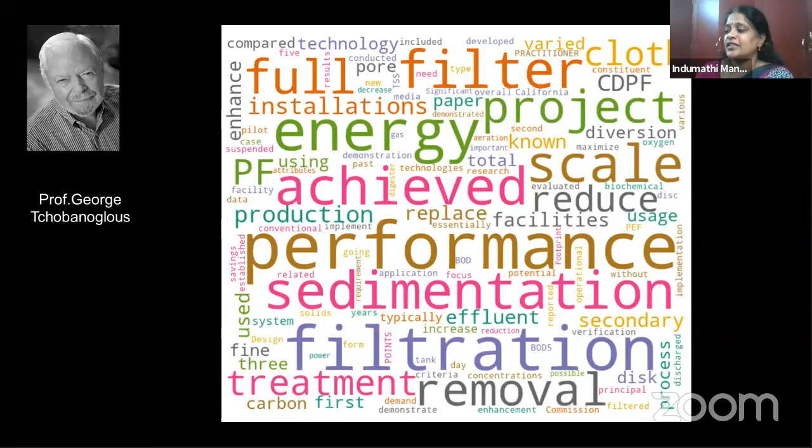Harold Leverenz is an environmental engineer with experience conducting studies in water use and resource recovery from waste streams. His recent work has included the development and testing of novel water and wastewater treatment processes, such as nutrient recovery from urine and digestate. This is actually the project which brought us together. He has also worked with anaerobic bioreactors, closed loop water reuse systems, and anoxic treatment wetlands. Harold received his BS in Biosystems Engineering from Michigan State University and MS and PhD in Environmental Engineering from UC Davis. Currently, Harold is a project engineer at UC Davis and is a licensed engineer in California.

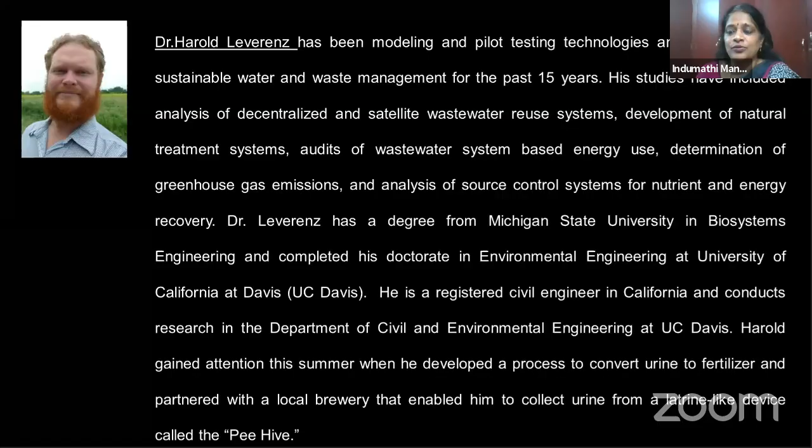Without much ado, I would request George to start his webinar, which is a very important topic: some things which normally we miss in conventional wastewater treatment design and operation. So he's bringing to us some of those missed concepts, which are very, very relevant to the 21st century and, more importantly, in current times. Over to you, George. Thank you.

It's my pleasure to be here with you. As I was telling Indu earlier, I haven't put a tie on in 9 months. And so if you can see me, I actually do have a tie on. So I'm delighted to be here.

And the topic today is really wastewater management in the 21st century. And what I want to do,

Move to your slides. Just open your laptop and then press the share screen, Professor.

Yes, sir, we can see your presentation now. You're all there. It doesn't go down here. I think we are fine. Yes. Which one? You just click on the button. Okay. So for our discussion this evening, what I'd like to do, I think it's this one, right? It was on before. Just open it and press the share screen. Okay, 1 second. Yes. We can see you're all set, sir. Can you see that? Can everyone see the screen? Yes. Yes, sir. All right.

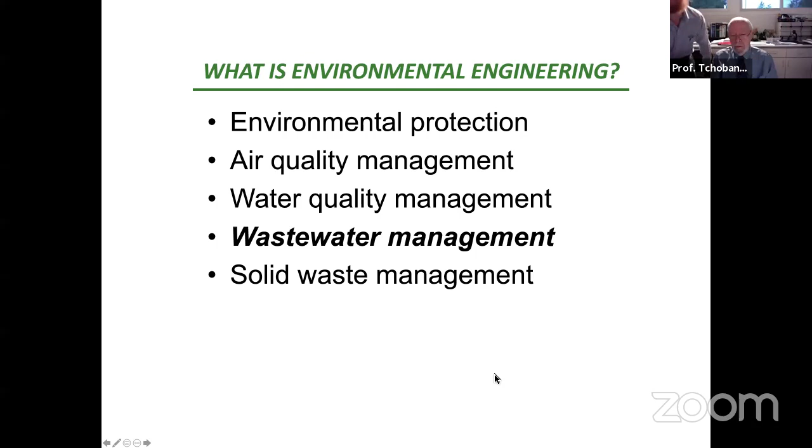It won't come down. And advancing. We're having some... This is the same one. There we go. You can choose the arrow keys.

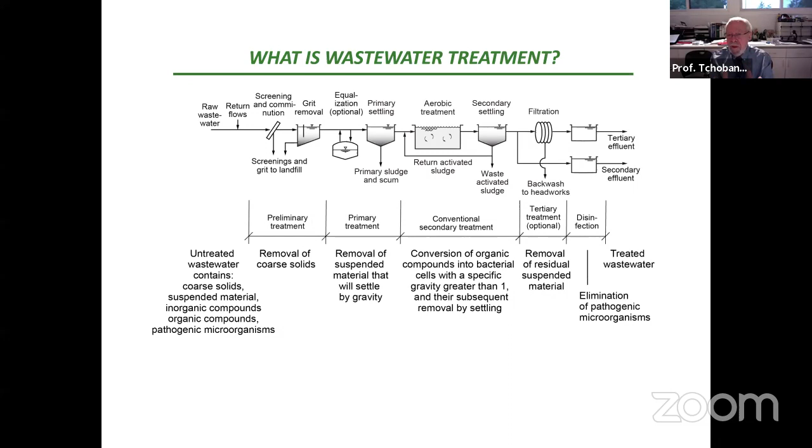So what are the 21st century challenges? Well, there are many, but I'd like to deal with three. The first one is we are going to have to deal with unintended consequences of past decisions. And in all of your work, all of you will face this particular problem. Secondly, we've got to bring about a paradigm shift to move beyond ideas that are limiting or no longer valid. And then finally, we need to talk about integrating water and wastewater management.

And so what is the problem here? If we want to reuse the water from either of these two locations, we have to pump it significantly, and we have to put pipelines in that would disrupt residential areas. So it has become a very complex issue to recycle from existing wastewater treatment plants. And again, the unintended consequence is that no one thought there would ever be houses all around these treatment plants.

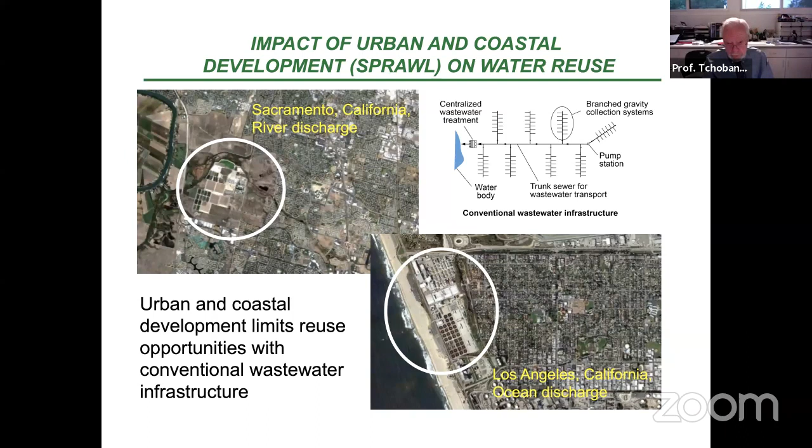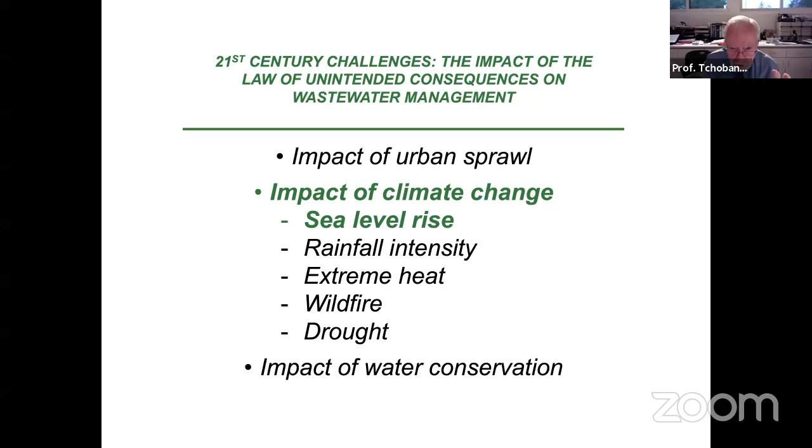But what has happened in recent times is that we have far greater hurricane surge flows and far more often than we had in the past. At the same time, there's been infilling here throughout. And with this infilling, as a result, with the larger volume, the surface water elevation at the end, when the velocity goes to zero, rises. And unfortunately, you see what happens.

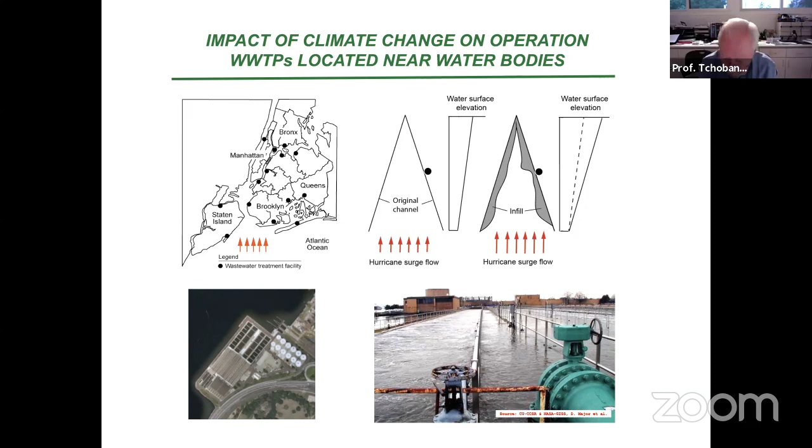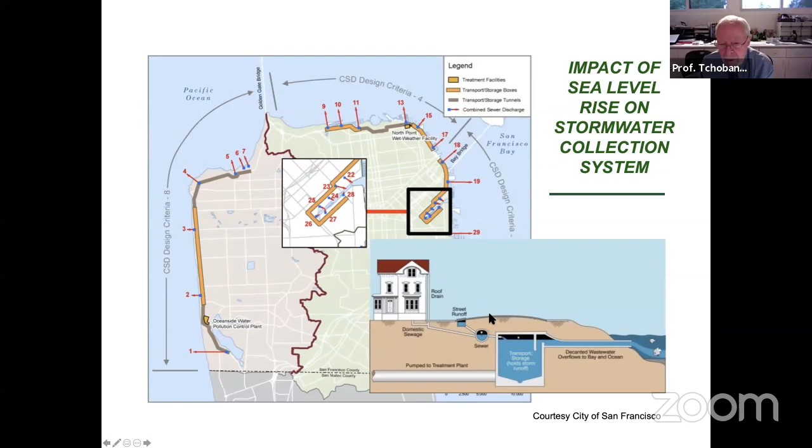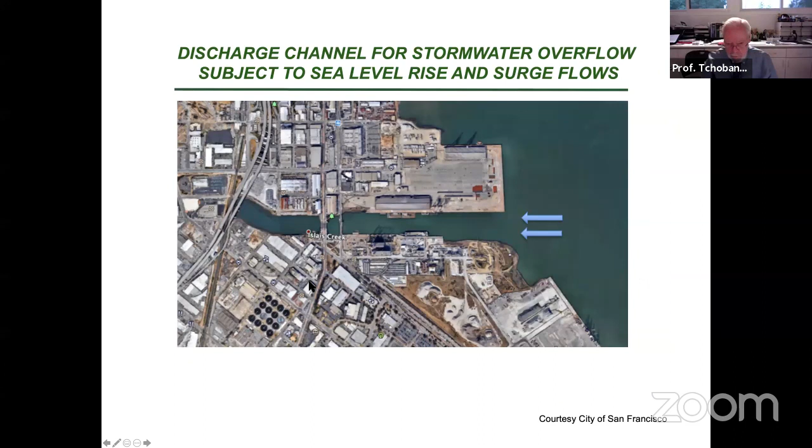Now, what has actually happened? Well, the weir elevation is set at -4. And look what's happening with the tides. And since 1950, the water levels, the tide levels have exceeded the elevation of the weir. So instead of water flowing out of the basin, water flows into the basin.

Now, what kind of problems are caused? Well, you bring in seawater with high sulfate concentration, and it mixes with all the oils and grease from the restaurants. And so if you walk along the Embarcadero in San Francisco, you will see vent pipes, and they're venting all the hydrogen sulfide that's being produced. And so here again, an unintended consequence.

What has happened now? They have had to raise the weir, and they have had to install pumps to pump water out of these basins into the receiving water. And again, an unintended consequence. No one ever thought the water would rise to this level. And with increasing sea level rise, these events are occurring all of the time.

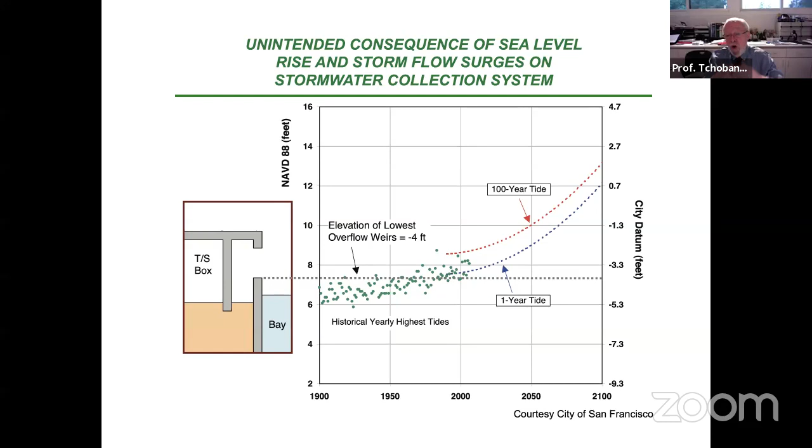Now, the next unintended consequence I'd like to consider is water conservation. And when we think about water conservation, I'd like to start with the diagram over on the left-hand side. Basically, our population has remained constant, but if we look at the total flow rate, it has gone down. Now, R1 is pre-1992, and around 1992, conservation measures started to be implemented. And as they've continued to be implemented, the flows have come down.

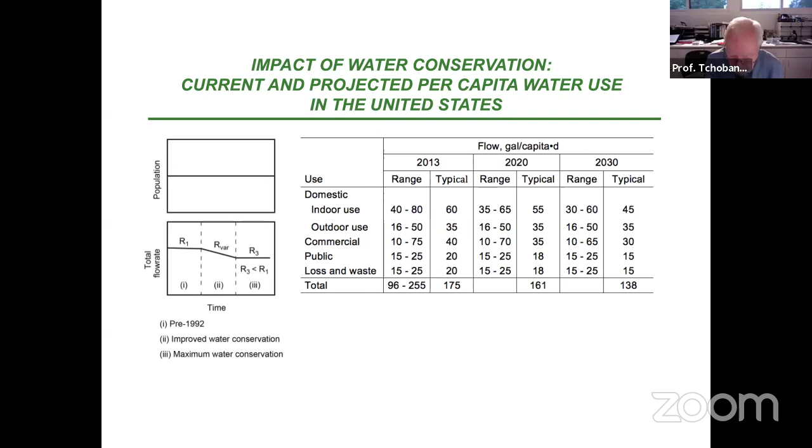The issue is we don't know where they're going to stabilize because there are still a lot of old appliances. For example, washing machines that have tubs with 30-gallon capacity. We're now moving to 7 gallons per load. So again, the idea is that we started at a relatively high value, we're moving down, and you can see what the rates are. So what does this mean with respect to concentrations of wastewater?

In the past, wastewater treatment plants were designed on some average concentration. And the issue now is that there is no average concentration. And so what we really have to do is consider the waste discharge per person, and then ask ourselves, what volume of water is that waste placed in? And so here's an example.

So if we look at constituents, BOD, chemical oxygen demand, total suspended solids, total Kjeldahl nitrogen, potassium, oil, and grease. And the unit we're going to use is grams per capita per day. And as it works out now, we have fairly good data on what the typical values are. So if you put these grams into 100 gallons, 380 liters, the concentration comes out to be 199 milligrams per liter. And that's in the past what we would call a medium strength wastewater.

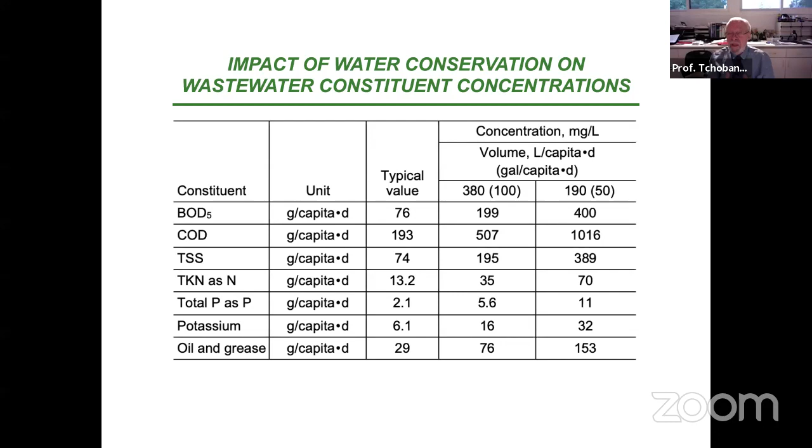But as the flow rate decreases to 190, the concentration is now 400. And so what we're finding as we go back and re-examine all of these existing treatment plants is that we're finding incoming BOD values of 300 to 600, way beyond design capacity. And again, no one ever anticipated the effects. When we instituted water conservation, everyone felt good about saving the environment. But let's see what's actually happened.

Here's an example of what's happened with respect to wastewater collection systems. When you flush a toilet with a low flush amount of water, you get solids deposition. Now the solids deposit, and in time they become anaerobic, and they will release hydrogen sulfide. The hydrogen sulfide is carried by skin friction down to reinforced concrete pipe, and we're seeing increased rates of corrosion that we never anticipated before. And so in many parts of the Midwest in the United States, the rates of corrosion have increased by a factor of 8.

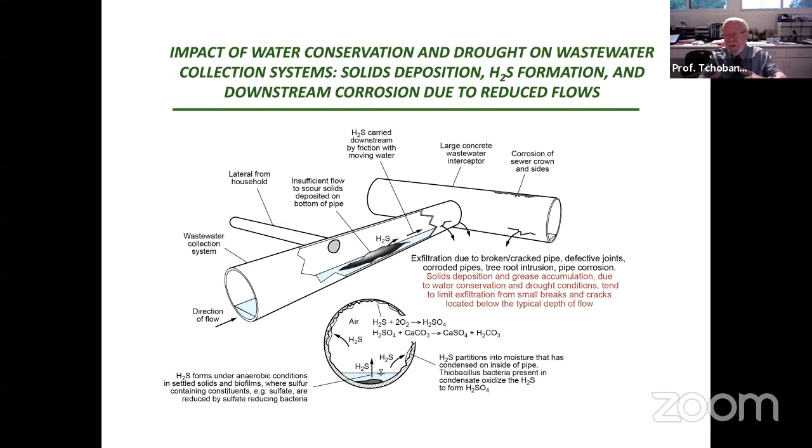Also, we're getting blockages. Now, both of these events were unintended consequences. When people started to use low flush devices, no one thought about the collection system. And yet, 80% of our infrastructure cost is tied up in the collection system. Here's an example of what happens in large collectors, grease accumulation. And the way grease accumulates is if there are irregularities in the wastewater collection system, they serve as nucleation sites for the formation and the buildup of grease.

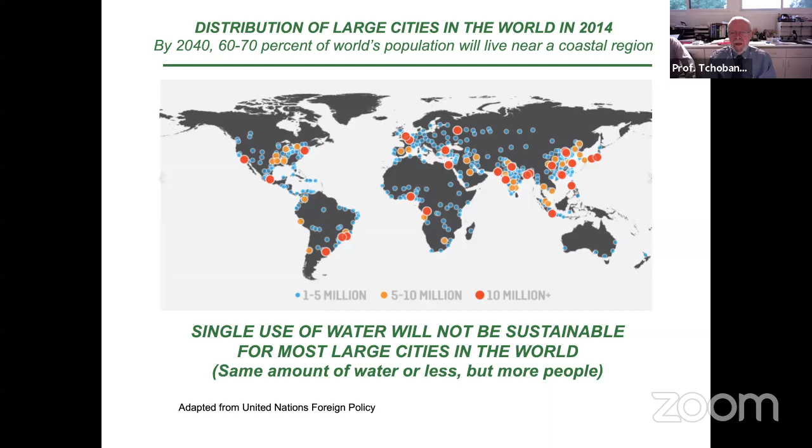And I would just like to highlight one of the problems here just for a second related to the fires in California. Now, we have always had fires, and there were always hydrocarbons that came into the rivers from runoff, storm rainwater runoff. But what is new now is that when so many of these homes have burned and all this plastic material has burned, when we get runoff, all of that goes into the rivers. Unfortunately, our water treatment plants were never designed to remove those constituents.

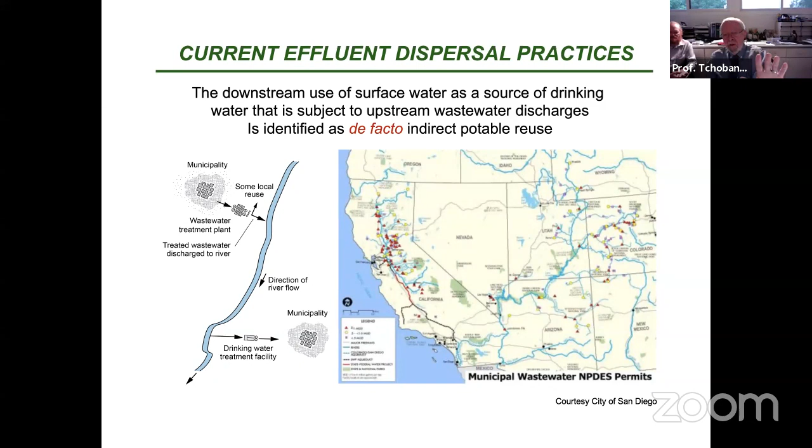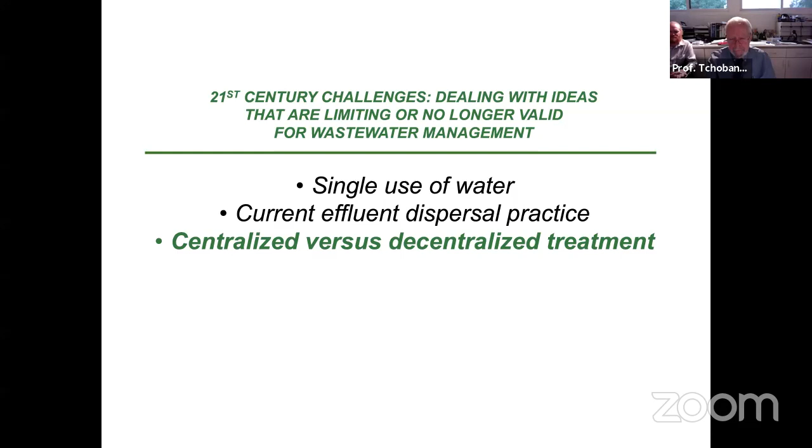Finally, in this segment, I'd like to consider centralized versus decentralized treatment. So on the left-hand side of this diagram, we have conventional wastewater treatment infrastructure. And the idea is it's much like a tree. It comes down to a central trunk, that is the wastewater treatment facility.

What I believe has to happen for all major cities in the world is we're going to have satellite or decentralized treatment. And that is, we're going to have upstream treatment and reuse. The concept is that we will be able to take this water, treat it, and use it locally before it goes all the way down to the treatment plant. That way, we will not have to pump all the way back.

Now, the best example of decentralized wastewater treatment is the city of Los Angeles and Los Angeles County. In the city of Los Angeles, this is the Tillman plant, Glendale plant. They are scalping plants. They pump out of the collection system, treat a constant flow, and discharge all of the solids to the collection system, which goes down to the Hyperion, the plant I showed you in the first slide.

So the idea is they've optimized treatment, and by upstream treatment, they're able to reuse this water locally here and not have it transported all the way down here and then to transport it back up. A similar system is operated by the Los Angeles County sanitation districts. And in my judgment, this represents the future for the world in terms of better utilizing our water resources.

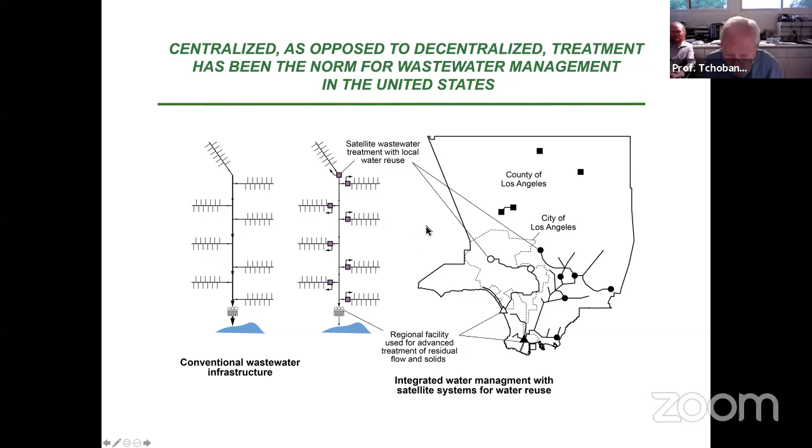So, future opportunities, and here let's take a positive view about all this. And I'd like to start out with new treatment technologies. And the first one I'd like to consider is primary treatment. In the past, historically, we have used primary sedimentation, and we have developed filters now that we can use following primary sedimentation. And what happens here is that you reduce the light material that is not settled, and you increase the solids that go to digestion to optimize gas production. The effluent then is much easier to treat.

Now, a very interesting aspect of this effluent is that by filtering it, you alter the particle size distribution. And when you alter the particle size distribution, you alter treatment kinetics. And so we're now beginning to explore what happens when you alter treatment kinetics. So the first one is known as primary effluent filtration. So if you have an existing treatment plant with primary clarifiers, filters can be added.

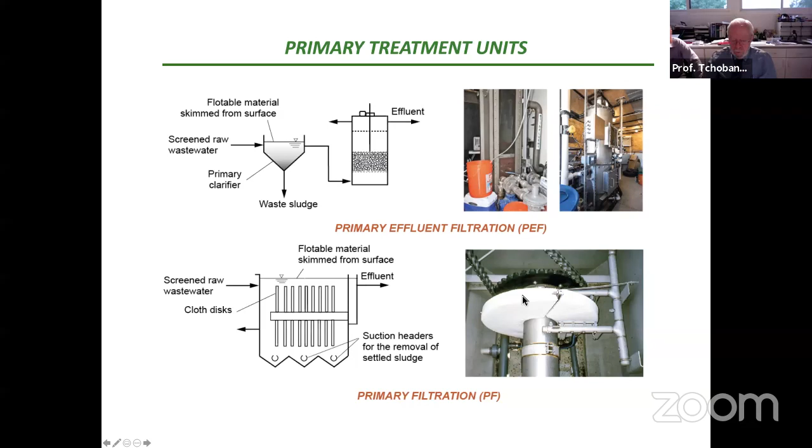In the second case, primary filtration, we're going to use a cloth disc filter to replace the primary sedimentation tank altogether. So there is no longer a sedimentation tank. And again, the effluent from the filters is very consistent, and the particle size is very small because the nominal pore size of this filter material is 5 microns. Well, what does this mean with respect to treatment?

This is a full-scale treatment plant, 2 MGD, and the unit shown in the circle here, which is depicted in the upper left-hand corner, replaces the whole primary concrete structure that you see here. So in other words, this tiny little box replaces this entire structure. Now that's going to be good and bad, as we'll see in a moment. But you can see the TSS coming in varies all over the place. The effluent quality is very stable and very predictable.

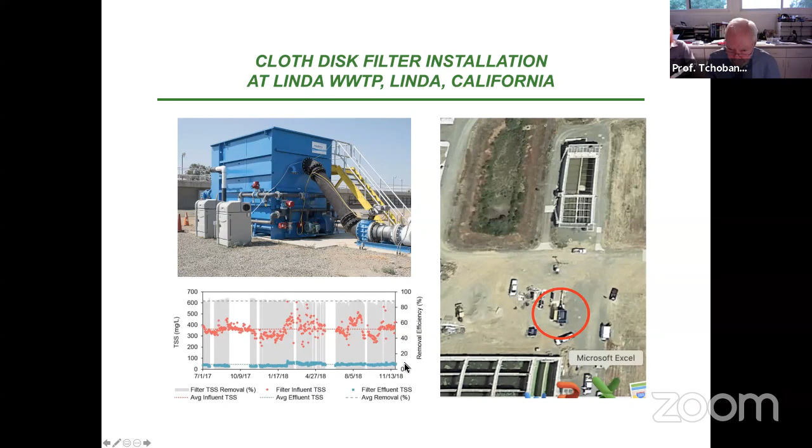Now, at the same time, we have developed new biological treatment processes that will reduce the size of the treatment facility to this little red square here. And this is our primary filtration in our little red square here. And there are many processes that are going to come, and we're going to be able to do this. But there are consequences in doing this because of the way our collection systems are built.

Let me go back, and now let's consider climate change. Wet areas are getting wetter, dry areas are getting drier, but by far the greater concern is the intensity of the rainfall event. And you can see that in the lower right-hand slide. And basically, here's the storm event, here's normal flow. It works out that our wastewater treatment plants are currently designed like bathtubs, water in, water out. They were never designed to deal with such peak events.

And so all of you that are watching this, this is one of the major issues you're going to face, and that is, how do you deal with these peak stormwater events and implement a very, very small treatment facility such as shown above? And this is going to be one of the challenges. In other words, technology has brought us to this level where we can take all of this facility and reduce it down to these two little units. But on the other hand, we are not really able to treat these peak flows.

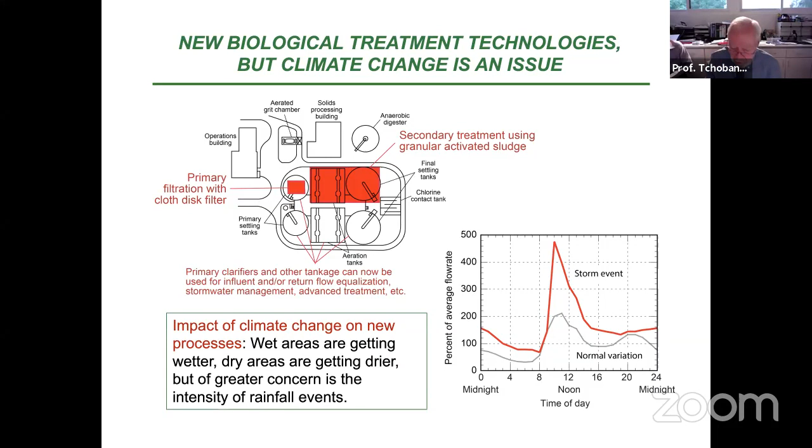Let's talk a little about potable reuse. And potable reuse really represents kind of the last frontier. And when we think about potable reuse, there are two types. There is indirect potable reuse and direct potable reuse. In indirect potable reuse, we employ an environmental buffer before the water is actually reused. So as shown here, we have a wastewater treatment plant, we have an advanced wastewater treatment plant, and we have either spreading basins or injection wells. Here's a reservoir, injection wells, spreading basins, more spreading basins. So the water is injected and then it's withdrawn, treated again, perhaps, and then distributed.

In direct potable reuse, we have, again, the advanced water treatment facility, but this time we supply water at the head end of a water treatment facility. It might be blended with other surface water, and that's known as direct potable reuse. If the advanced water treatment facility is also permitted as a drinking water facility, we can then inject this water directly into the distribution system.

But someone raised the question of temperature earlier. When you think about temperature, this water is going to be very warm. So when you open your faucet, we're not accustomed to warm water. So we're going to have to cool it. So again, there's all of these consequences that we're going to have to think through.

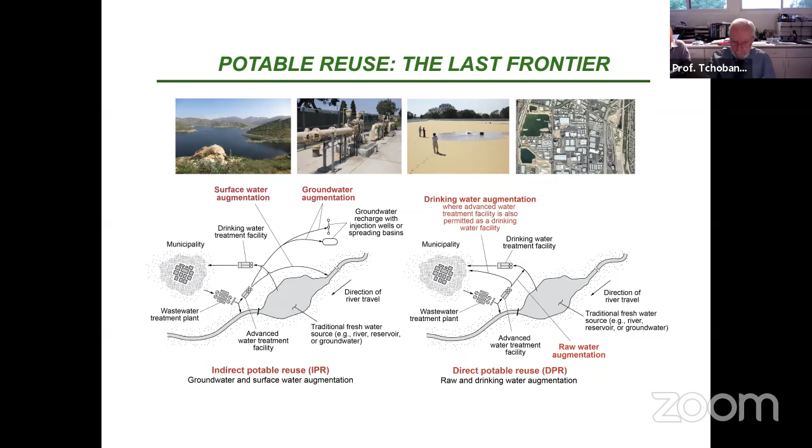Now, when we talk about advanced treatment, it has become very sophisticated. And perhaps the best example of all this is the Orange County Water Treatment Facility in Orange County, California. The flow diagram is shown. One of the first things we have is flow equalization, and you can see the tanks in the upper left-hand corner.

We then go through microfiltration, shown in the middle photograph, upper photograph, and then cartridge filters. That's followed by reverse osmosis, shown in the lower left-hand corner, advanced oxidation below it, decarbonation to remove the carbon dioxide, and the addition of lime to stabilize the treated effluent.

Now, the thing that's interesting about this is when you look at cartridge filters and you ask yourself, if you go through submerged microfiltration, why do you need a cartridge filter? Well, we need cartridge filters because the purity of the chemicals that we add is not sufficient to avoid damaging the reverse osmosis membranes. So the cartridge filters are basically used as a pre-treatment for the reverse osmosis. So this represents a fairly complete treatment, and I would say at this point represents the state of the art.

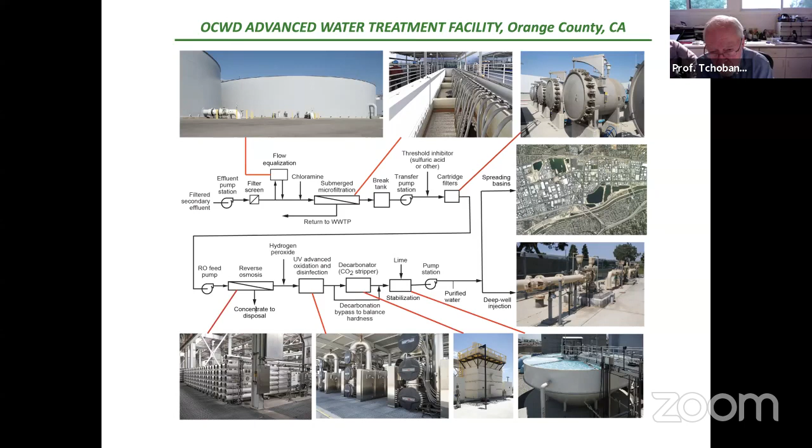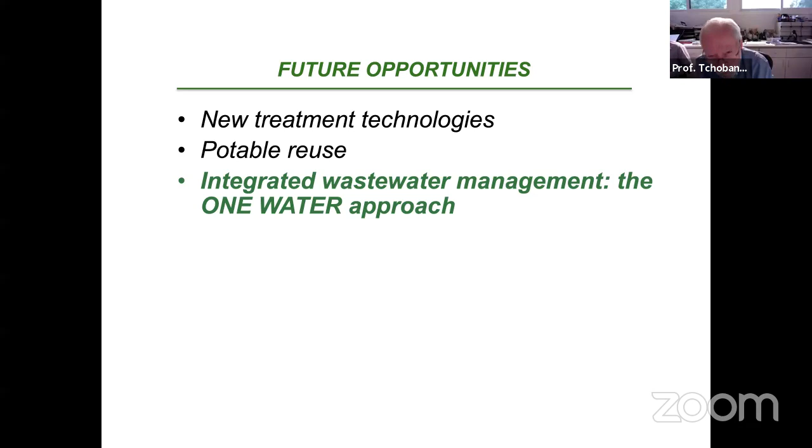So the last thing we want to talk about is integrated wastewater management, and that's the one water concept. Right now, when we talk about water in municipalities, we have a wastewater agency and we have a water agency, and very often they're at odds with each other. But let's take a look at what the future might look like. In the one water approach, what we're saying is that all water, including drinking water, wastewater, stormwater, gray water, and other waters, are treated collectively as a resource that must be managed holistically and sustainably.

Now, the only way to do this is if we merge all of these individual departments, and in some communities even the solid waste division, into a single water entity that, when it plans, can think about both the water side and the wastewater side and how to integrate that.

So upstream treatment. In addition, we have interception type and extraction type satellite systems. All of these form a kind of water reuse picture. And so we're utilizing the water upstream. The downstream plant can provide removal of solids and other materials. But here the concept is we're going to take water upstream and utilize it at those locations. And we're also going to extract water and intercept water. So what do those systems look like?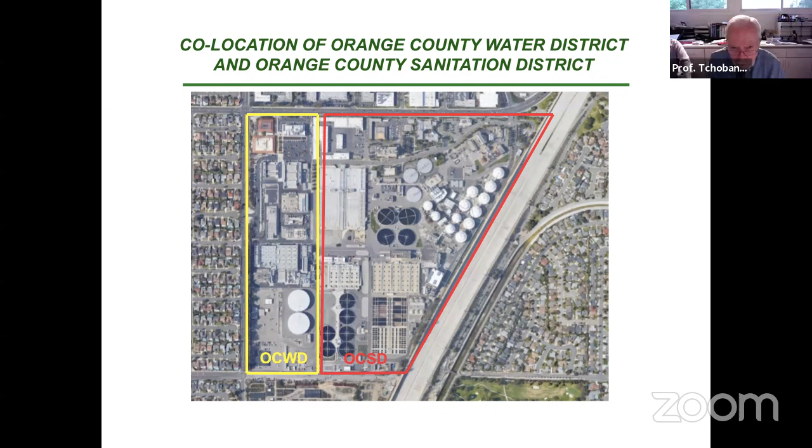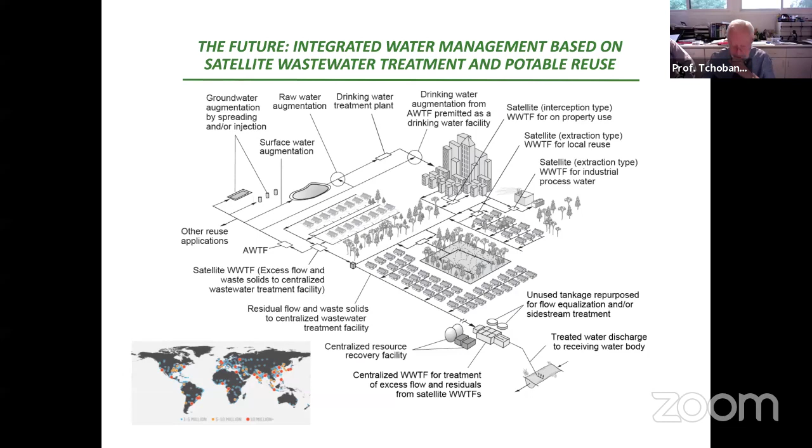And if I go back one, these two plants are co-located in Orange County, right next to each other. Here I've shown them separated because that might be the more optimal solution. But again, we need to think about them. The idea is that we take this wastewater, treat it, we go through advanced wastewater treatment, and we can use it locally. And that way we get multiple uses out of the water.

So what are the take-home messages from all this? I think the first one is that in the future, proper consideration must be given to unintended consequences. For example, Harold and I were talking about treatment plant designs. Well, you might not anticipate earthquakes, or lightning strikes, or the fires that we've had in California. But I think as we move ahead, if we're going to make these facilities resilient, you're going to have to think very deeply about unintended consequences.

The second issue: we've got to move beyond ideas and concepts that are no longer valid. For example, if I were to pose the question to you, why do you need primary sedimentation when we have a cloth disc filter? And so we have to think about alternative configurations. The configurations that we use now for wastewater treatment are 100 years old. There've got to be new ideas. And so I'm sure that many of you in the audience will have new ideas that will bring about change.

And then finally, we really have to think about a paradigm shift in how we manage water and wastewater. It really has to be managed as one entity. We have to think of it as one water.